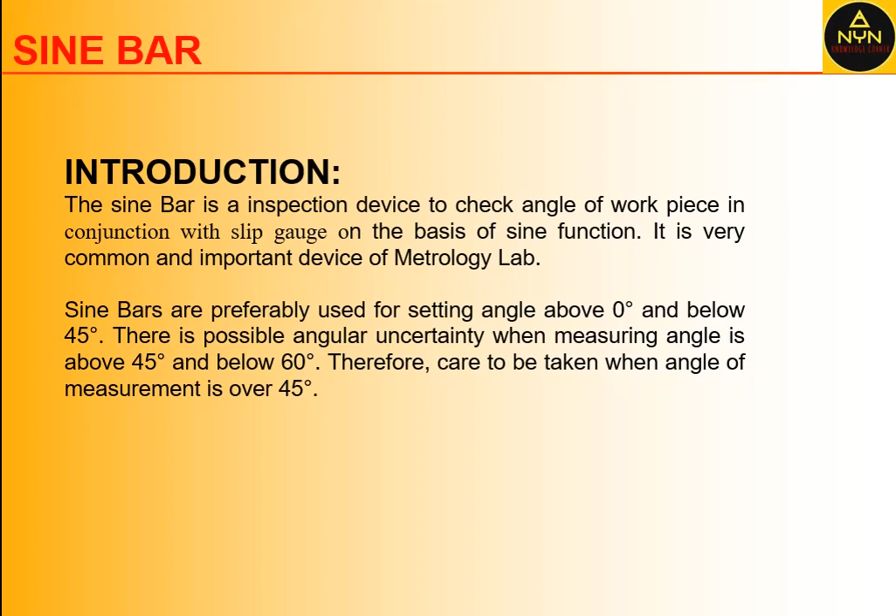Working principle. The center distance between the two rollers of the sine bar forms the hypotenuse, that is L, of a right angle triangle. The length of surface plate between the two rollers is the base, and the height of slip gauges placed between the rollers and surface plate forms the perpendicular, that is H, of the same right angle triangle.

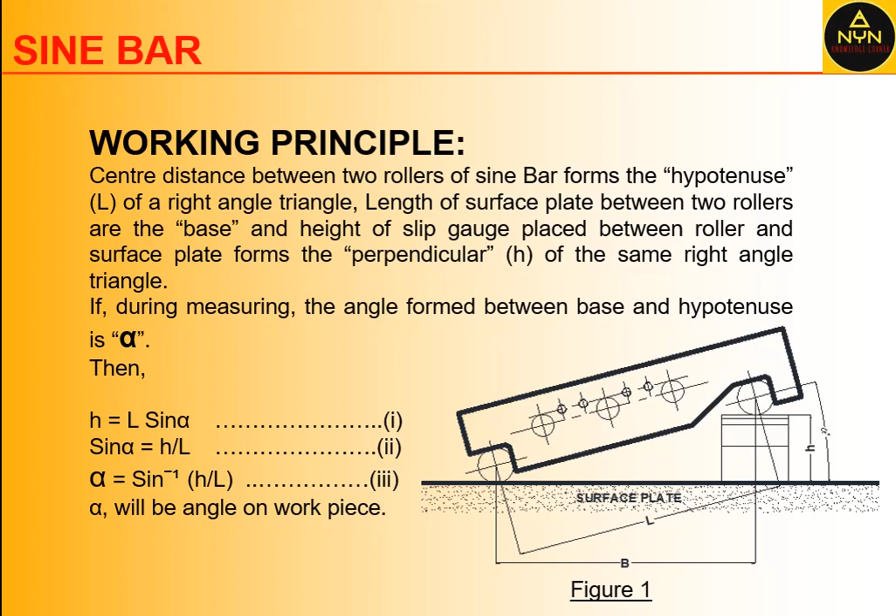If during measurement the angle formed between base and hypotenuse is alpha, then H = L sin alpha, equation number 1. Sin alpha = H/L, equation number 2. Alpha = sin inverse (H/L), equation number 3. Alpha is also the angle of the workpiece that is to be measured.

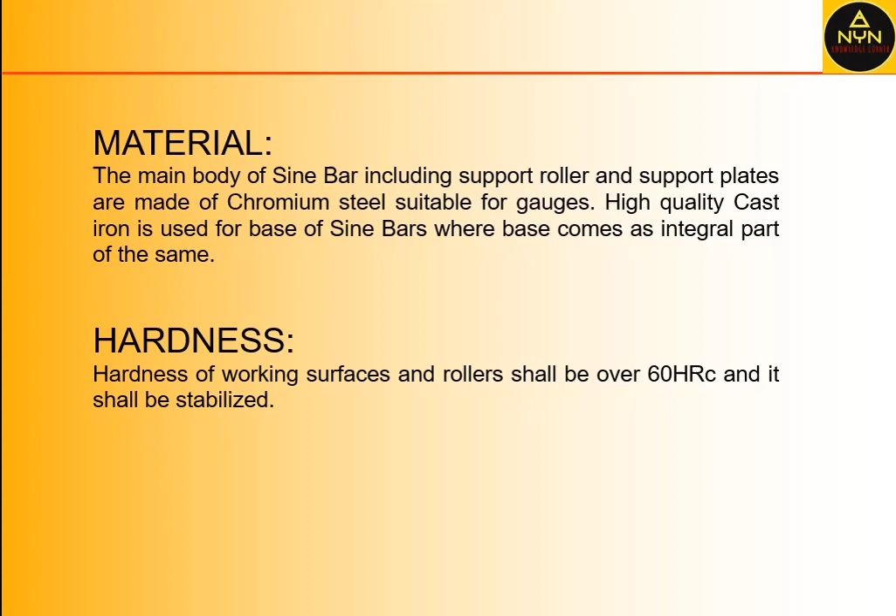Material. The main body of the sine bar, including support rollers and support plates, is made of chromium steel suitable for gauges. High quality cast iron is used for the base of sine bars where the base comes as an integral part. Hardness. Hardness of the working surface and rollers shall be over 60 HRC, and it shall be stabilized.

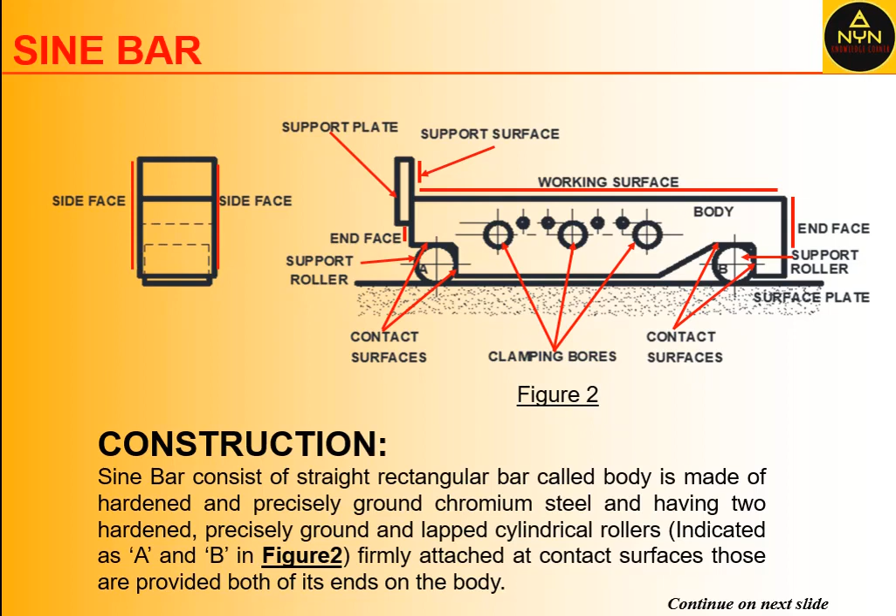Construction. The sine bar consists of a straight rectangular bar called the body, made of hardened and precisely ground chromium steel, having two hardened, precisely ground and lapped cylindrical rollers, indicated as A and B in figure 2. These rollers are firmly attached at the contact surface and provided at both ends of the body. When the sine bar is placed on the surface plate, the rollers' contact surface shall be parallel to the surface plate.

Most sine bars are provided with a support plate mounted at one end of the rectangular bar, as shown in figure 2. In some sine bars, roller A is hinged for swivelling and roller B remains free for angle setting. In such types of sine bars, the base becomes an integral part of the sine bar.

Generally, sine bars are provided with 3 clamping holes and a fitting edge. Tapping holes are provided pairwise, symmetrical to the middle clamping hole. Clamping and fitting holes vary according to the size of the sine bar.

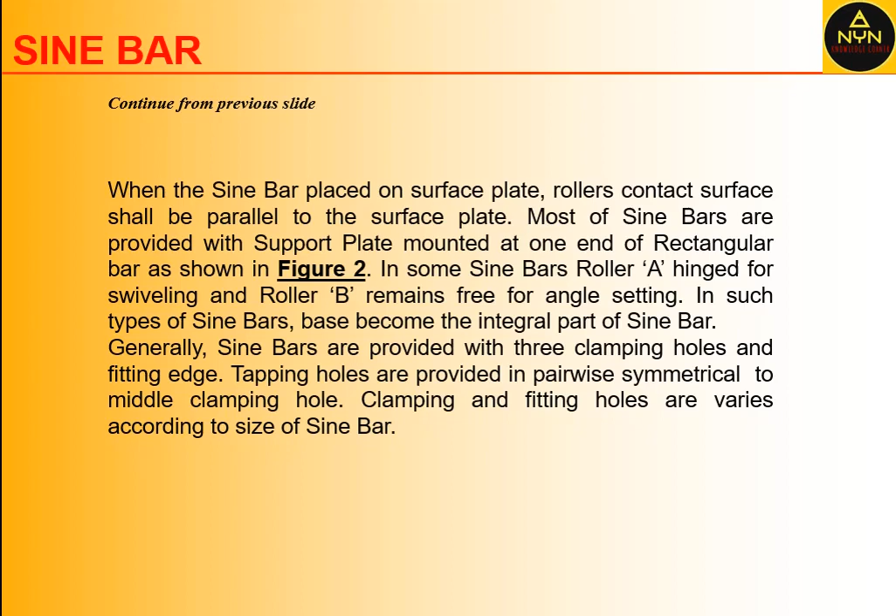Dimensional specification. A sine bar is specified by nominal size, or the straight distance between the two rollers, distance L as shown in figure 1. In IS 5359-1987, it is specified as 100, 200, 300, 400 and 500 mm. Guidelines of dimensional details for all the above sizes are also available in the same standard.

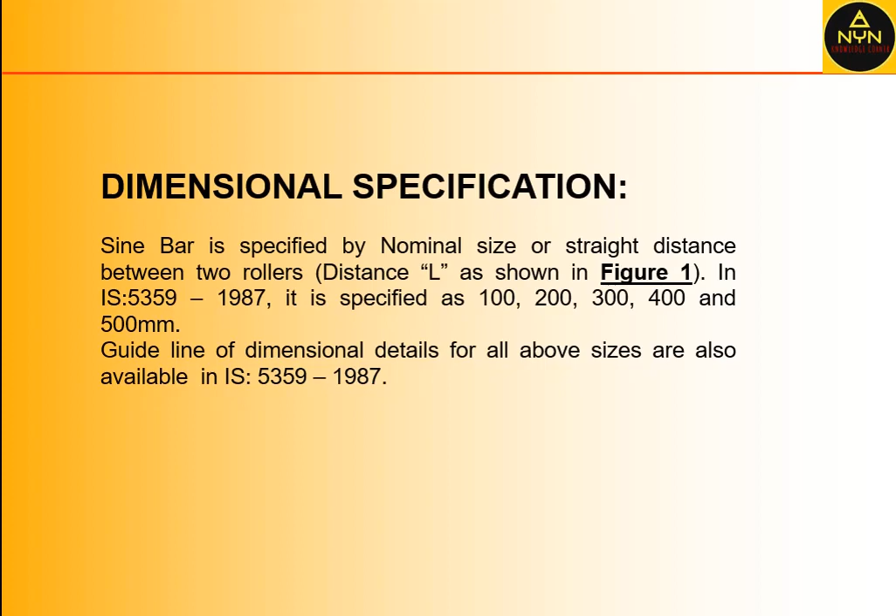Accuracy. In accuracy, we will see dimensional and angular accuracy. First are the important dimensional and geometrical tolerances. Sine bars are high precision equipment. Dimensional and geometrical tolerances are maintained according to IS 5359-1987 or the latest one. Similar to this standard, other standards are also available.

Permissible tolerance on length: plus minus 2 micron for the smallest size, that is 100, and plus minus 10 micron for the largest size, that is 500 mm, as mentioned in the standard. Roller axis parallelism: plus minus 1 micron for the smallest size, 100, and plus minus 3 micron for the largest size, 500 mm. Permissible roller diameter tolerance: plus minus 2 micron for all sizes.

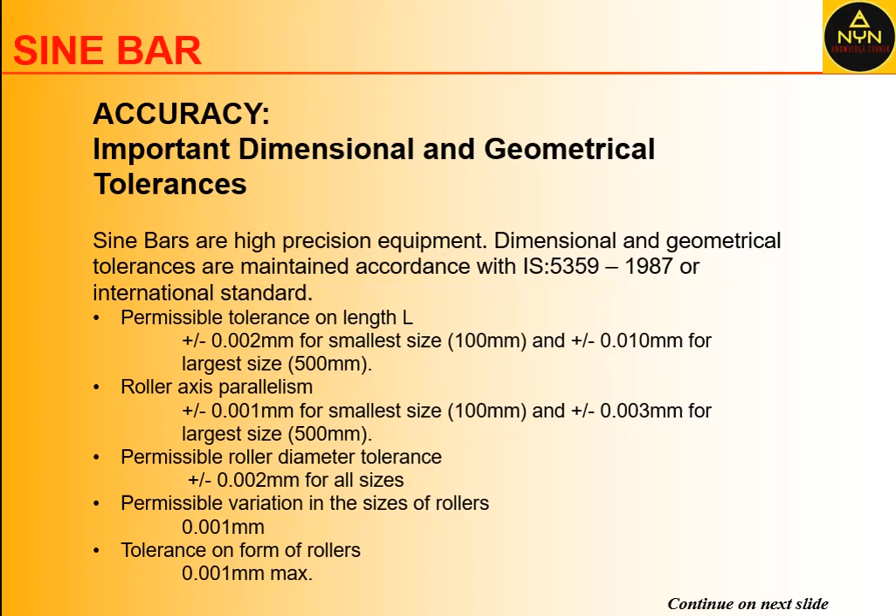Permissible variation in the sizes of rollers is 1 micron. Tolerance on form of rollers is maximum 1 micron. Parallelism between working surface and end contact surface is 1 micron in 100 mm. Parallelism between end face and roller's axis is 5 micron in 10 mm. Perpendicularity between end face and side face is 1 micron in 10 mm.

Perpendicularity between end face and working surface is 1 micron in 10 mm. Perpendicularity between side face and working surface is 1 micron in 10 mm.

Now, angular uncertainty. Angular uncertainty for an unstressed sine bar varies with angle and size. We see some examples. For a 15-degree angle and 100 mm length sine bar, it is plus minus 4 seconds. For the same angle and 500 mm length, it is plus minus 2 seconds.

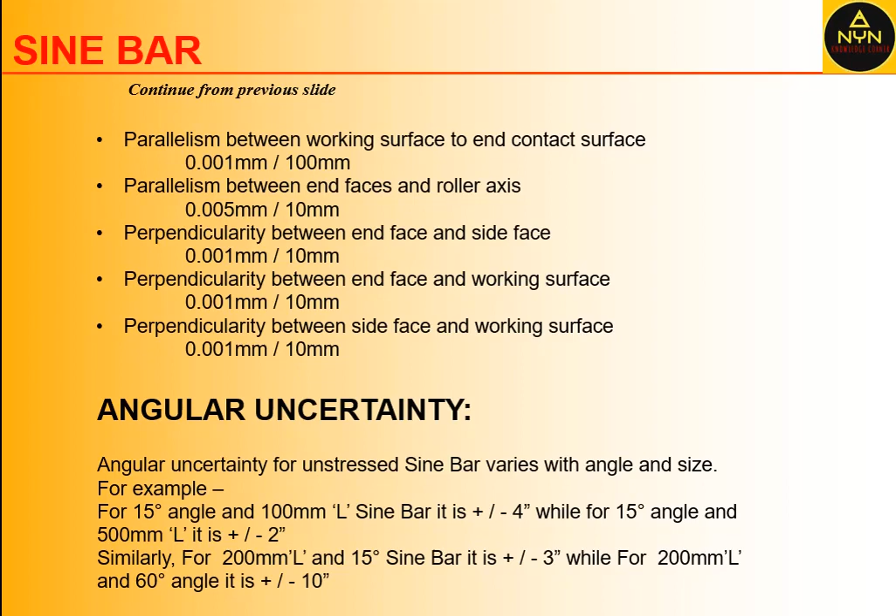Similarly, for a 200 mm long and 15-degree angle sine bar, it is 3 seconds, and for 200 mm long and 60-degree angle, it is plus minus 10 seconds.

Angle measurement method when workpiece is over sine bar. To measure the angle of the workpiece, the following steps are to be followed. Put the sine bar on the surface plate as shown in figure 2. Rest the workpiece firmly over the working surface of the sine bar. Taper of workpiece must be along the length of the rectangular bar.

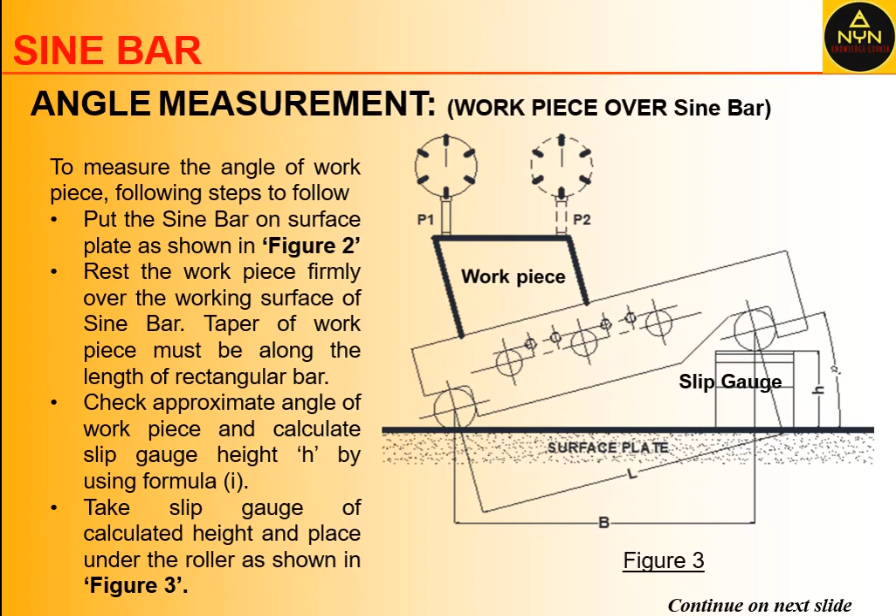Check the approximate angle of the workpiece and calculate slip gauge height h by using formula 1. Take slip gauges of the calculated height and place under the rollers as shown in figure 3. Mount a dial gauge rigidly on the dial stand. The base of the dial stand rests on the surface plate. Then place the dial pointer at one end. It is P1 as shown in figure 3.

Note down the reading. Alternatively, adjust the dial gauge reading to 0 and, without disturbing the pointer of the dial gauge, move it to point 2 as shown in figure 3. The reading is to be noted again. The difference of both readings is to be calculated, meaning reading at point 1 minus reading at point 2.

In case the difference is positive, slip gauge height needs to be increased, and in case it is negative, slip gauge height is to be reduced. This process needs to be repeated till both side readings become equal or 0. Now calculate the total height of slip gauges by adding the size of all slip gauges used in measurement. This calculated value will represent the perpendicular, that is h.

Distance L for sine bars is known, and by putting the values of h and L in formula 3, we can get the angle of the workpiece. The other one, when the workpiece is placed under the sine bar. In this case, the sine bar is placed over the taper of the workpiece that is to be measured. Slip gauges are placed under both rollers and the difference is considered as h. The rest of the method is the same as we discussed earlier.

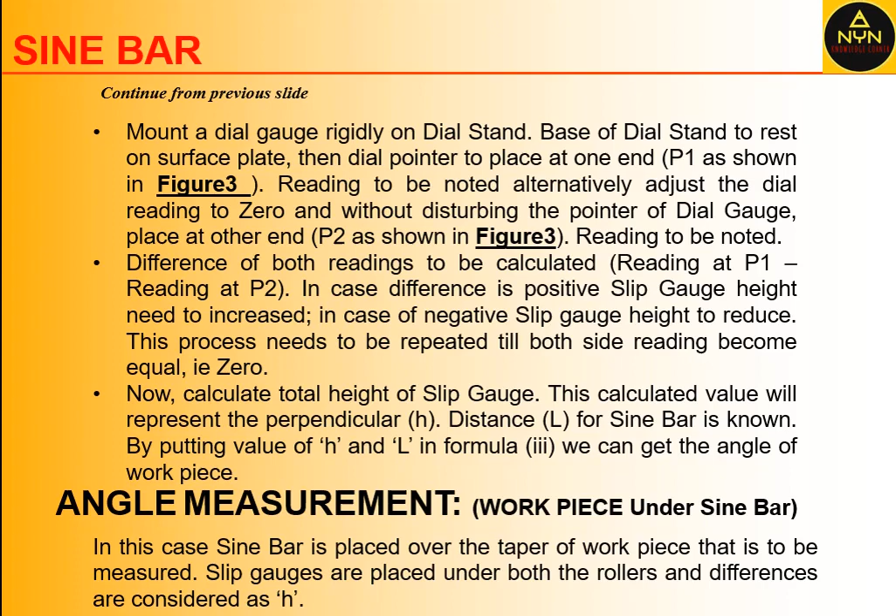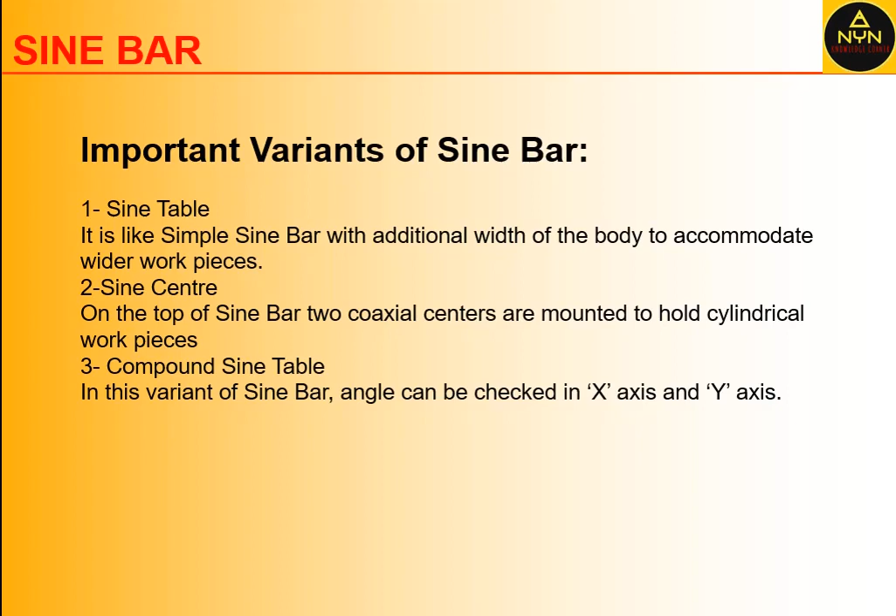Important variants of sine bar. There are three important variants of sine bar that are generally used in industry or laboratories: sine table, sine center, and compound sine table. Sine table is very similar to a simple sine bar, only the width is increased to accommodate wider workpieces. Sine center: on top of the sine bar, two coaxial centers are mounted to hold cylindrical workpieces. This equipment is called sine center. In a compound sine table, angle can be checked in X and Y axis. We discuss these variants in a separate video.

Some applications of sine bar. First, determination of angle of flat workpieces. Second, a special type of sine bar that comes with two center points to hold cylindrical parts, also known as sine center, is used to check taper of cylindrical parts. It is used in surface texture and surface profile checking instruments to hold the sample horizontally. It is very common in metrology labs of precision auto components and the bearing industry.

Sine bar is not just a measuring device but is also used as a fixture for precision taper surface milling or grinding with a high degree of accuracy. The workpiece is rigidly held on the working surface of the sine bar, the angle adjusted by using suitable slip gauge sizes, and firmly clamped. For production purposes, most of the time customized height blocks are used that increase rigidity, reduce the chance of error, as well as save costly slip gauges.